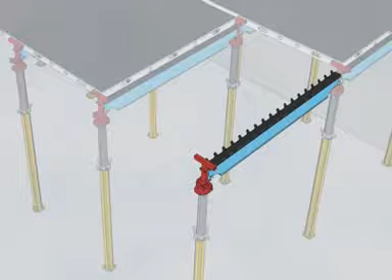PERI Skydeck, the fast slab formwork system made of high-strength aluminium. Skydeck is comprised of four main system elements: drop head, main beam, panels and cover strip. In many cases, striking can take place after only one day.

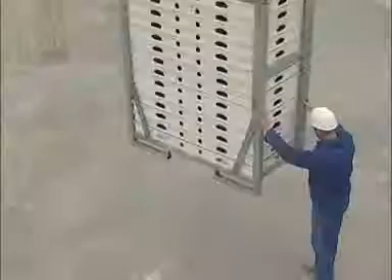The wide prop spacing of 2.30 by 1.50 meters saves on materials and creates more working space. Skydeck system pallets are used to ensure safe and space-saving transportation. Aluminium makes site operations easy due to the system's lightweight components. No Skydeck component weighs more than 15 kilograms.

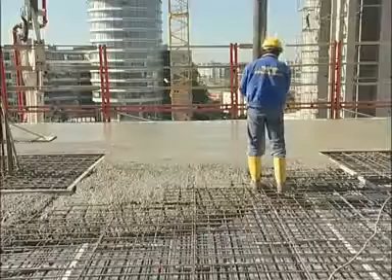Slab thicknesses of up to 95 centimeters can be concreted. Self-draining edges and powder coating reduce the amount of cleaning to a minimum. The Skydeck poster, which is available in a number of languages, provides valuable information on the practicalities of working on the job site. Even more information is available in the Erection and Instructions for Use brochure.

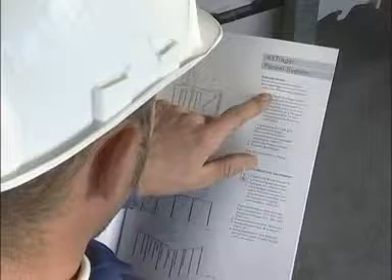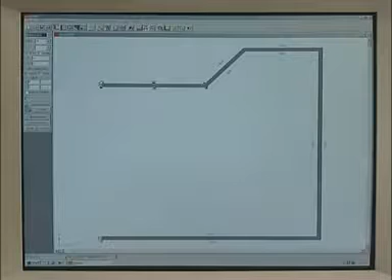Skydeck plans are quickly and easily created with PERI LPOS, the software for rational formwork planning. LPOS requires no previous CAD knowledge. The plan view details are quickly entered or simply taken from an existing plan. If the wall formwork has already been designed using LPOS, then this plan view is used. LPOS schedules predetermined concreting cycles or the complete plan view.

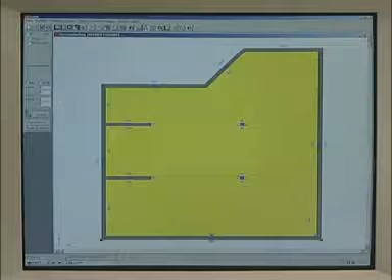Printed formwork plans simplify work on the job site. Parts lists ease the whole material logistics process. PERI CAD is the most comprehensive and professional planning solution tool within AutoCAD. The formwork elements are available as ready-made blocks. Automatic placing through drag and drop ensures an easy and simple design process.

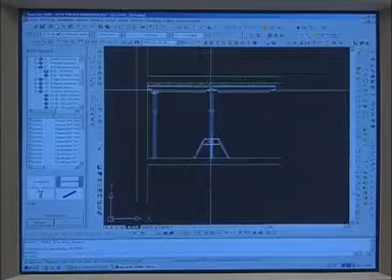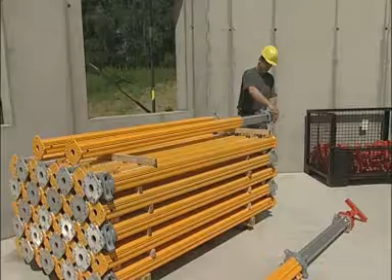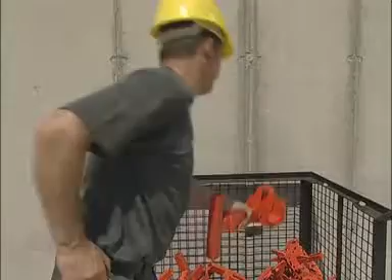During erection, the slab supports are adjusted to the required lengths. The drop head wedge is secured in the working position, and then the drop head is inserted into the prop. Thanks to the self-locking coupler, assembly is a simple process. Assembly normally begins in one corner. The first prop is erected with a prop head and secured with a tripod.

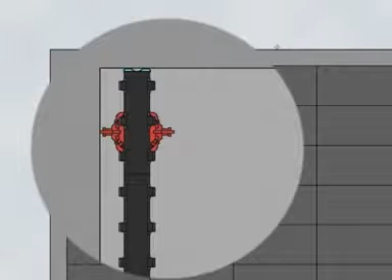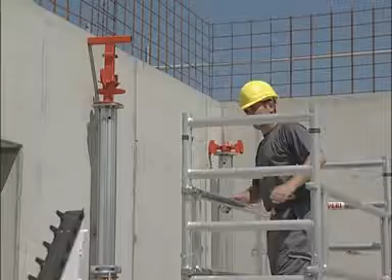Using Skydeck panels, setting out begins directly from the wall itself. Prop assembly is carried out with the following spacings: 12.5 centimeters from the longitudinal wall and 25 centimeters from the transverse wall. After the second prop is assembled and secured, the main beam is hooked in position. The beam connection encloses around the center at the head connection point.

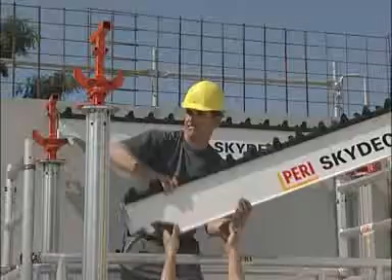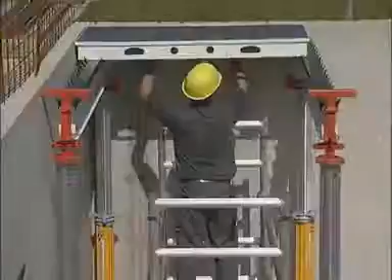For assembling the second main beam, erect another prop with drop head. Assemble the second prop with drop head, secure, and position the main beam. The first panel can now be laid. The panels center themselves automatically on the main beams and are also secured in position laterally through the toothed plastic racks. With the third panel, the first section is now complete.

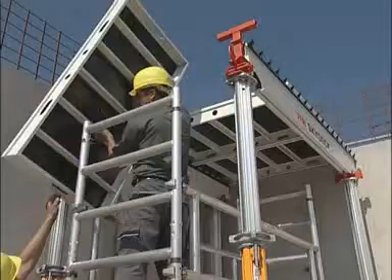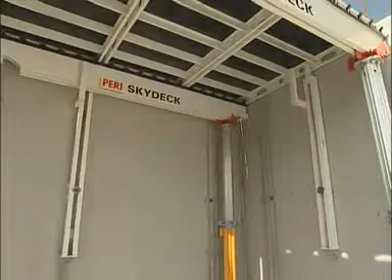The formwork must be anchored in every second bay in order to transfer the forces created during assembly. The Skydeck wall holder is used to secure both the main beams as well as the panels. This allows levelling to take place afterwards. When a large enough area is assembled, erection continues from above. For this, the panels are set down on the assembled area.

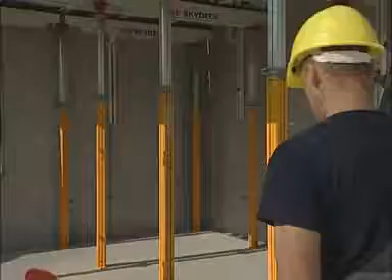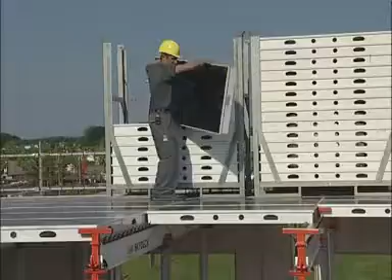Assembly continues in the same way for each additional bay. Hook in the main beams to the drop heads, attach drop head props at the other end of the main beam, and erect. Lay panels. The simple assembly process makes erecting PERI Skydeck very easy. From the first use, you will quickly become experts.

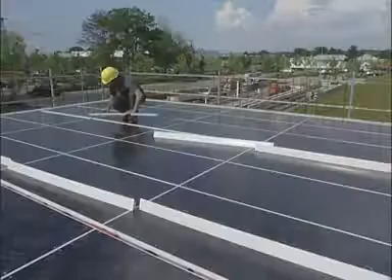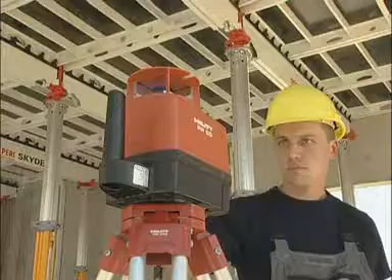The empty pallets are placed under the assembled areas so they are in the right position when striking. Skydeck cover strips close the joints between the sections. Simply push them in place. The standard area is now ready and can be levelled. Hold the measuring rod on the under edge of the main beam and adjust the props.

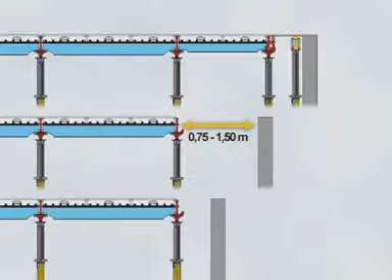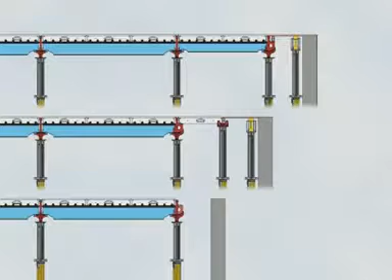Now the infill areas are closed. Firstly, the longitudinals. For filler areas between 1.50 m and 2.25 m, erection continues with the Skydeck main beam 150. For infill areas between 75 cm and 1.50 m, directly supported Skydeck panels are used. Infill areas of up to 75 cm are closed with filler timbers. Using infill panels reduces the amount of infill areas.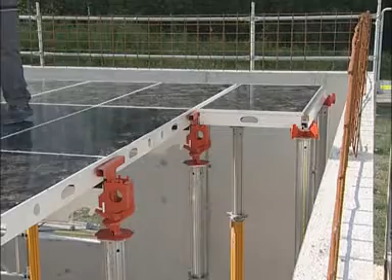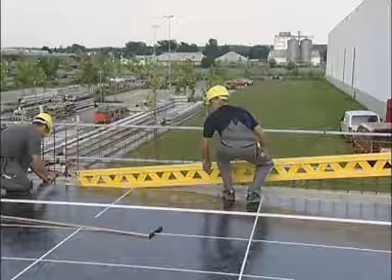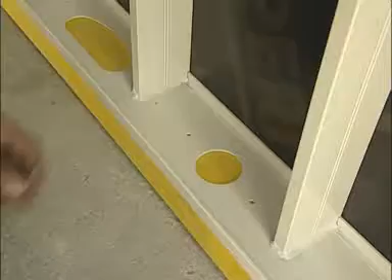Transition from beam-supported areas to directly supported panels is achieved using panel end supports. They are simply placed on the drop heads. A prop with prop head is erected on which the panel is laid. The Skydeck edge beams are placed on the prop heads, and an edge beam is attached on the wall side. Nail the filler timber and then the longitudinal infill area is complete. For narrow infill areas of up to 5 cm, filler timber is simply nailed to the panel.

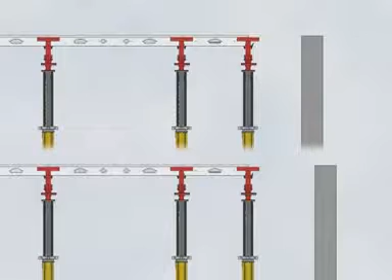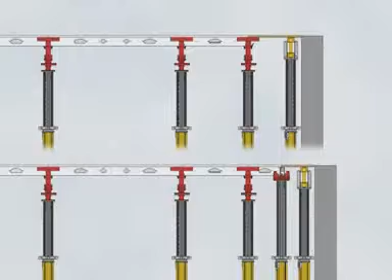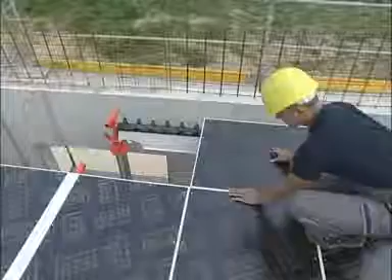Transverse infills up to a maximum of 1.50 m are done with main beams and standard panels. The remaining infill is closed with filler plates. Using infill panels, the filler plate areas can be considerably reduced. As the chart shows, longitudinal panels are placed in position for larger infill areas. The 75 cm panel closes off the bay.

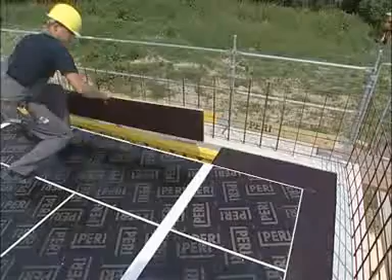The Skydeck edge beam is now placed on the last main beam. As an alternative, Skydeck filler timber can be used. The edge beam is assembled and the filler plate nailed into position. Transverse infilling is now complete.

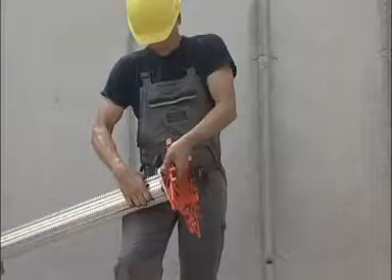Alternatively, infills with combi heads can be made. These can be used to close filler areas with widths of up to 24 cm and without additional edge beams. For transverse infilling with directly supported panels, it also bridges the drop head joint. Edge beams can be laid around the panels, for example, where longitudinal and transverse infillers meet.

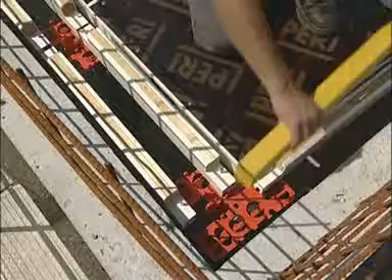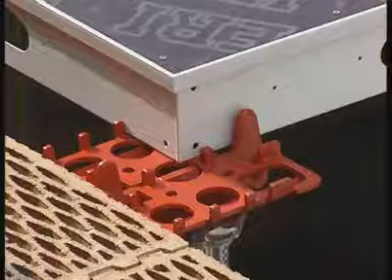If early striking is not necessary, the system can be erected using only the combi head. The combi head supports main beams, panels and infills.

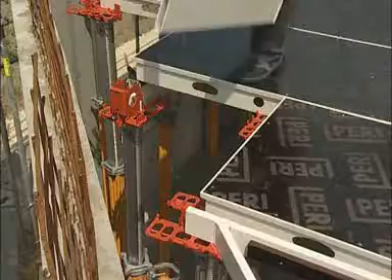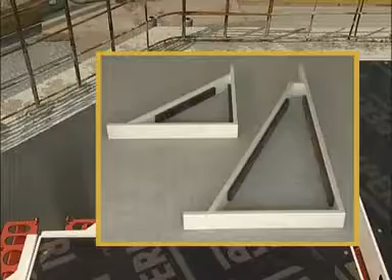Erection is continued at angled walls with directly supported infill panels. The Skydeck triangular frame is fixed as support for the filler plates. An end support is mounted only at the end of the beam. The two different size Skydeck triangular frames allow cost-effective and system-compatible infilling at angled walls.

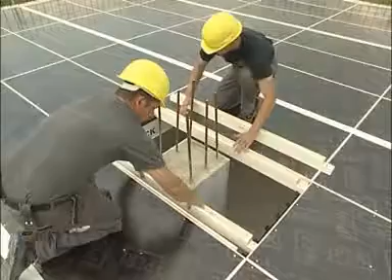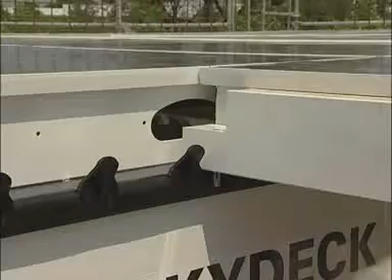Skydeck offers system-compatible solutions for infill areas around columns. According to the position and size of the column, several panels and even the beam have to be replaced. Using infill panels reduces the amount of infill areas. Skydeck edge beams are secured against moving when assembled. Always close the infill areas with filler plates.

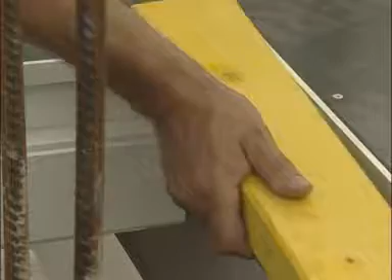Turned upside down, the edge beams allow the fixing of transverse filler timbers. In this way, larger spans are supported. Removing this main beam can be avoided. This takes place by simply turning the row of panels.

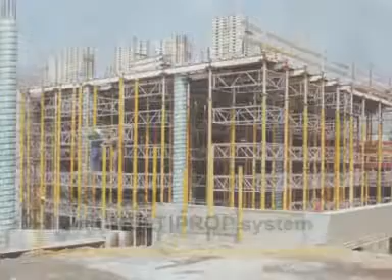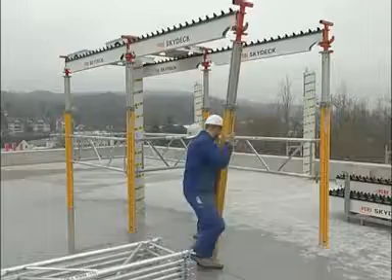The MULTIPROP system ideally complements Skydeck slab formwork, particularly for high ceilings, or here, in skeleton structures. Extremely stable birdcage scaffolding can be assembled with MULTIPROP frames and props. Place the props in position and attach the MULTIPROP frame.

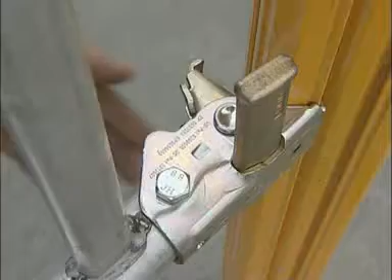Depending on the project, shuttering can begin at any position. Spacings are according to the Skydeck grid design. During erection, horizontal forces are transferred through the MULTIPROP system until the filler areas are closed.

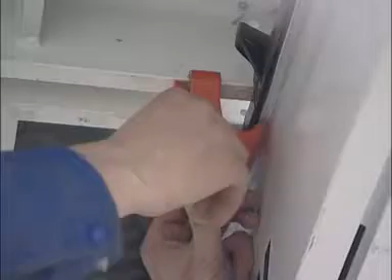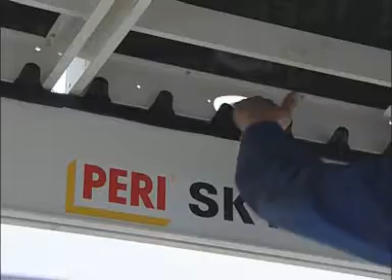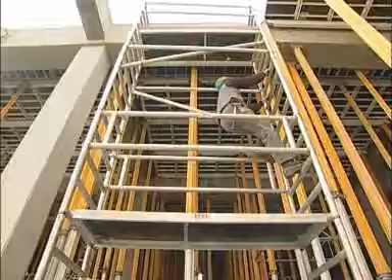If required, the panel wedge clip is fitted. It increases the stability and also serves as a securing device against wind. The simple panel clip also prevents uplift. The Peri stripping cart guarantees safe and easy handling. The maximum standing height is 4.65 meters.

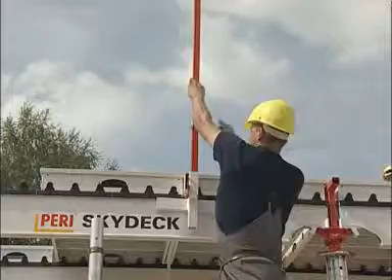Operational safety is easily established with Skydeck. With the handrail holder, the safety handrail system is quickly assembled. It is fixed on the longitudinal side between the panels. The safety handrail system can be mounted on the front if a filler panel is used in the last bay.

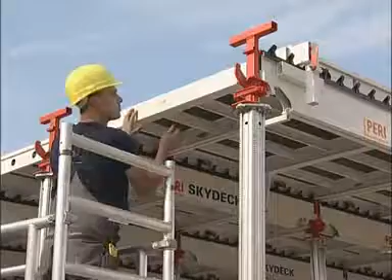In the corner, a handrail holder for the corner post and an additional one for front side rails are mounted on the beam. Slot in the handrail posts and insert the handrail boards and toe boards. Operational safety requirements are now complete.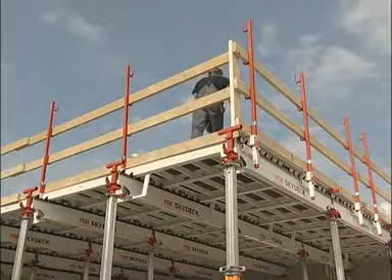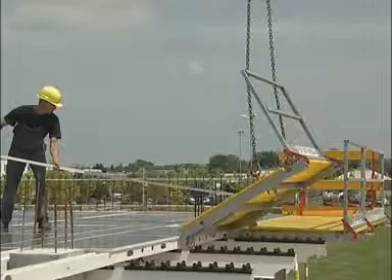Safety on the slab edges is provided by Peri Skydeck platforms. They not only act as safety scaffolding, but also have a generous working area with a 1.30 meter width. Skydeck platforms are simple to erect. The permissible load is 150 kilograms per square meter.

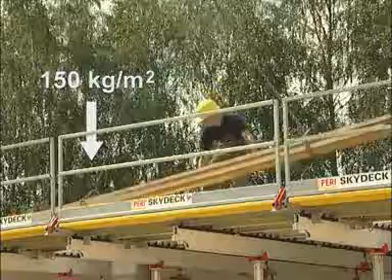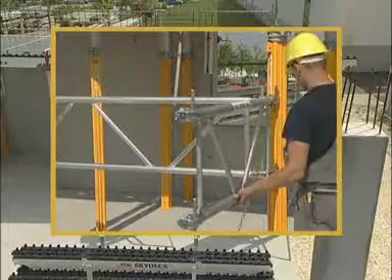Fitting the Skydeck platforms begins at the building's outer corner. Firstly, the props together with tripods are placed in position. Alternatively, or with ceiling heights of more than 3 meters, the props are braced with multi-prop frames. The main beam 375 is used here. It offers a standard grid length of 2.25 meters and 1.50 meters for the cantilever.

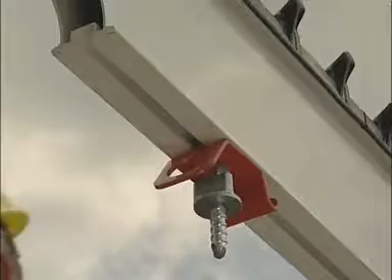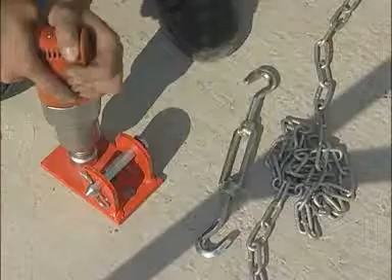A preformed channel on the underside of the beam makes assembling easier. To prevent any tipping, the tension sleeve is mounted approximately 50 centimeters from the prop. A base plate is firmly secured on the ground. With the reusable MULTI-MONTI bolt, Peri provides the most appropriate fixing materials. Attach the chain and tighten. The area can now be shuttered.

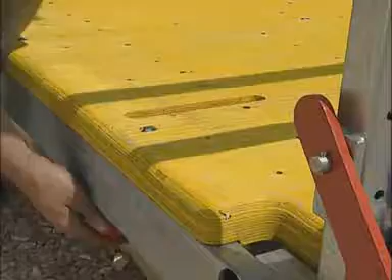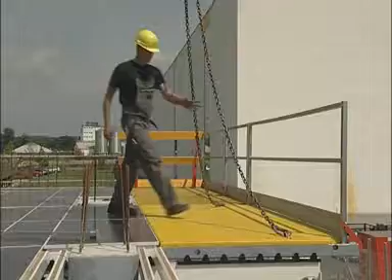Skydeck platforms can be stacked, thus saving valuable space on site. Simply open out and it's ready. The platform is craned to the on-site location. The platform is moved into position with the shuttering aid. The notch on the beam automatically positions the platform. Unhook the integrated crane eyes and the platform is automatically secured against uplift.

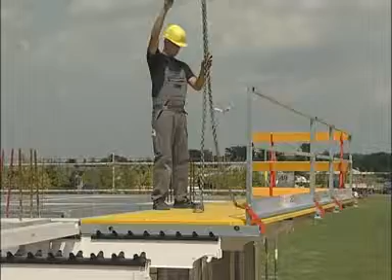Further details are available in the Skydeck platform instructions for assembly and use. Now follows the reinforcement and concreting.

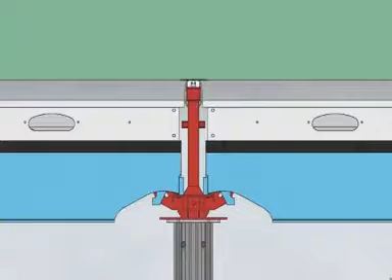With the Skydeck drop head, striking can, depending on the slab thickness and concrete strength, take place after only 1 day. The drop head is released by means of a hammer. This results in the main beam and panels being lowered by 6 centimeters. Firstly, the filler areas are struck. After this, the panels are removed bay by bay.

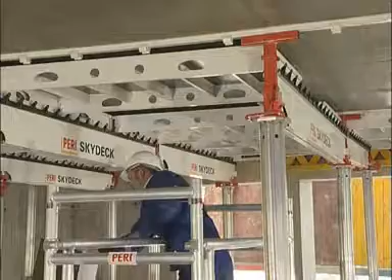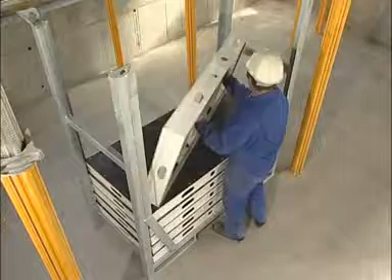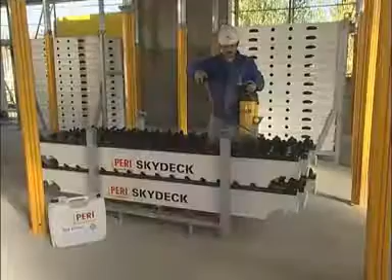For transportation to the next location, the panels are stacked on pallets. The main beams are also disassembled bay by bay. Only the drop head props and cover strips remain in situ for the whole of the curing period. Spray the beams and panels with the environmentally friendly concrete release agent PERI Bio Clean. The powder coating, plastic rack and self-draining edges reduce the amount of cleaning to a minimum.